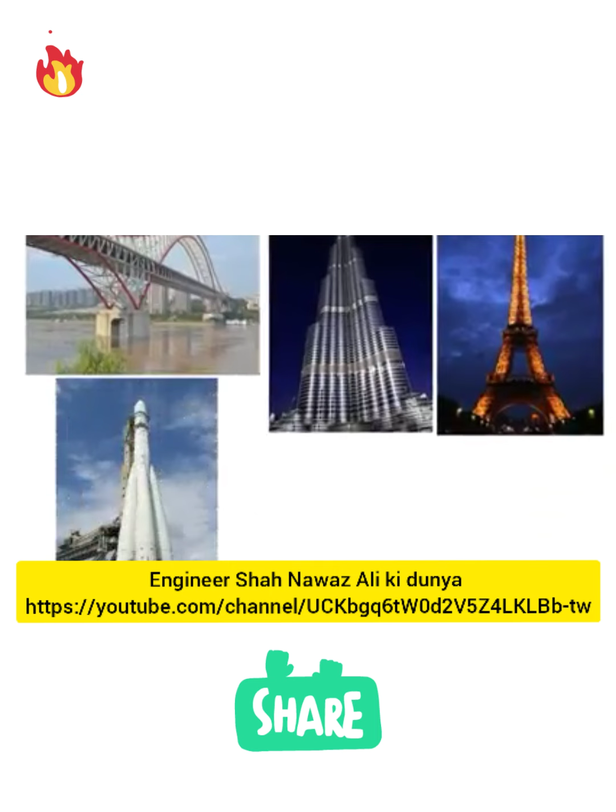So first, structural engineering is about calculating and understanding the forces, strength, stability, and so on within a structure. It could be a bridge, a skyscraper, a landmark, or even a spacecraft or aircraft. Remember, these structures are very heavy and need to support their own weight so that they don't collapse. Now this subfield is the most math intensive and has lots of physics.

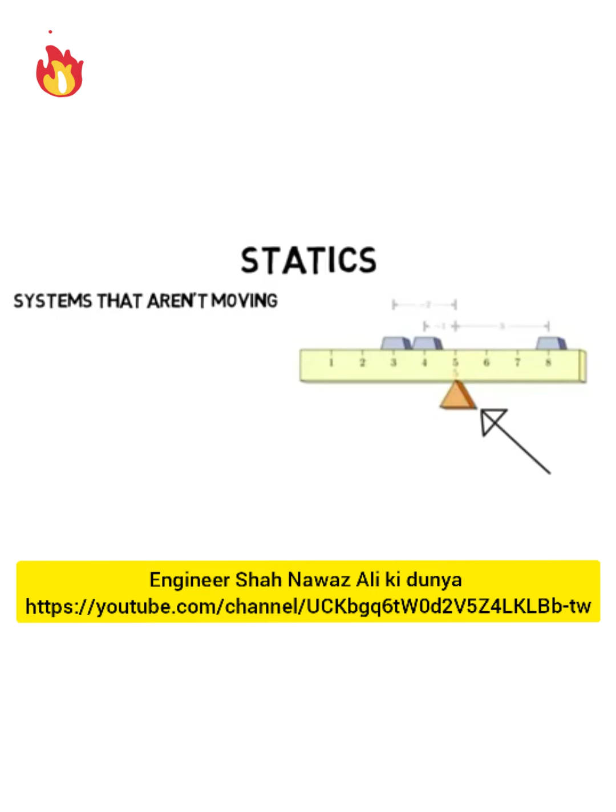All civil engineers will take a class called statics, which is all about the forces and systems that are not moving. In basic physics, you may have done a statics problem, like where does this support have to be for the system to be totally balanced and therefore not moving. You summed all the forces which equaled 0 and all the torques which equaled 0. And that's the basics of statics.

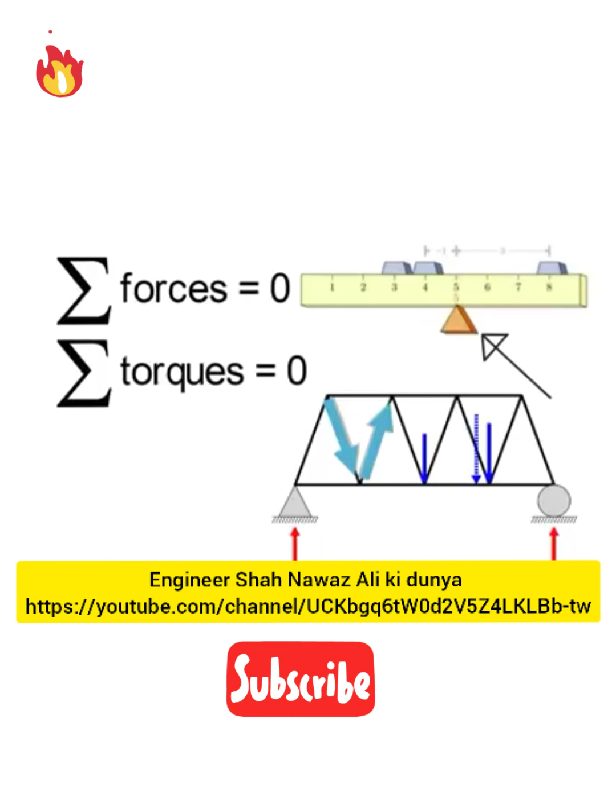So if you're looking at the forces within a bridge or truss, well, the same principles apply, but now there's just more to it. The weight is straight down as shown in blue, all the beams exert forces on one another, but the sum of them is equal to 0, and the torques sum to 0 as well because the bridge is not moving. And it's of course even more complicated than this, but if you enjoy that kind of basic physics you see above, then you'll likely enjoy the statics and physics you see in structural engineering. So that's just a very simplified explanation, but now let's dive into some of the classes they would take.

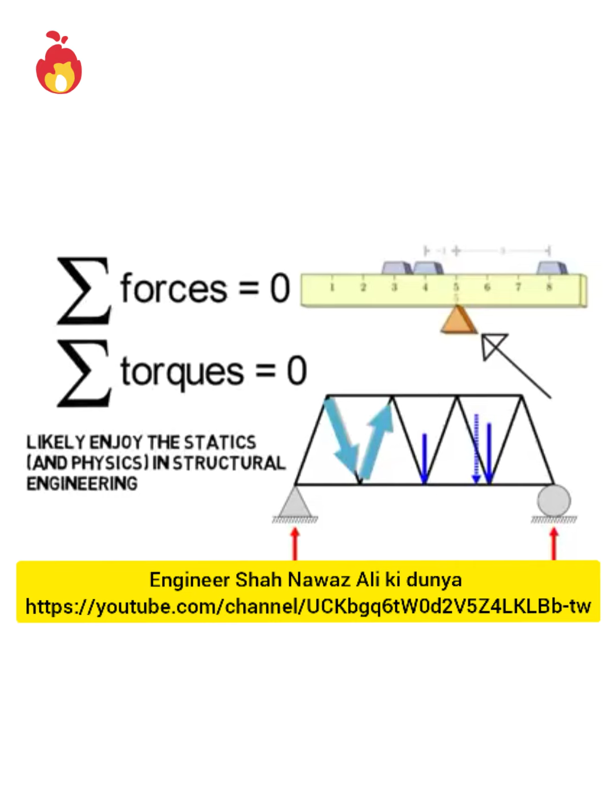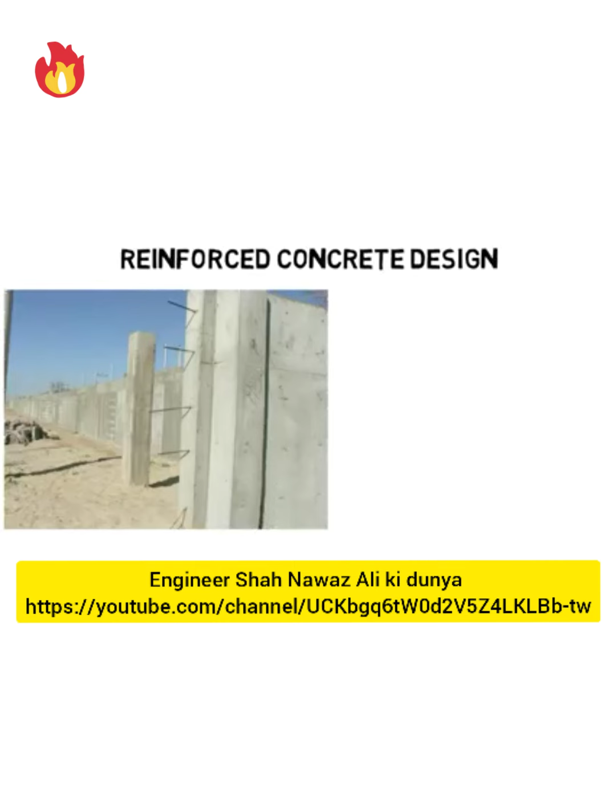One class that would be important for structural students is a reinforced concrete class. In concrete structures, they reinforce it by putting steel beams in the concrete. We can't see those beams, but here, before construction is done, you can see them sticking out, or you can see a lot of them on these unfinished columns. So why do they do this? Why isn't concrete good enough?

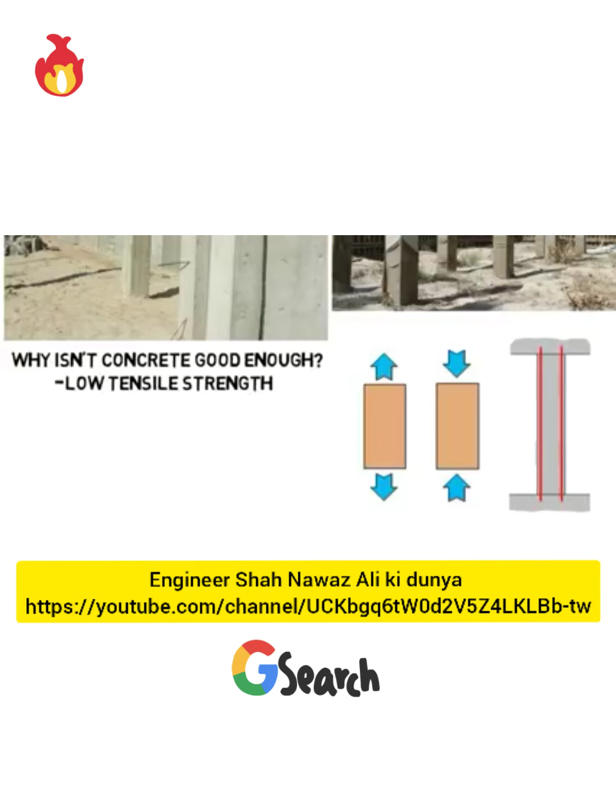Well, concrete alone, once hardened, has low tensile strength, as in it does not handle being pulled very well. However, it's okay with being compressed. But to counteract that low tensile strength, they add steel beams and pour wet concrete, which hardens around them, and then those steel beams have high tensile strength to counteract those types of forces on the structure.

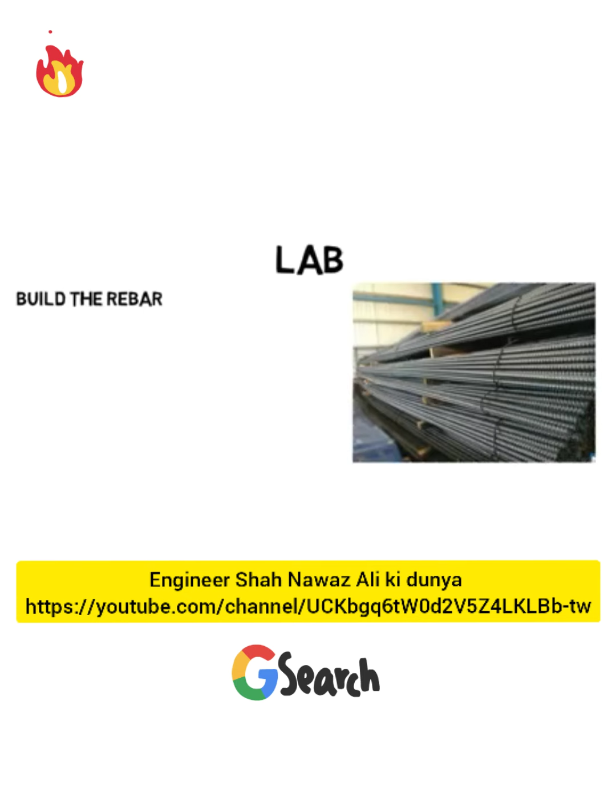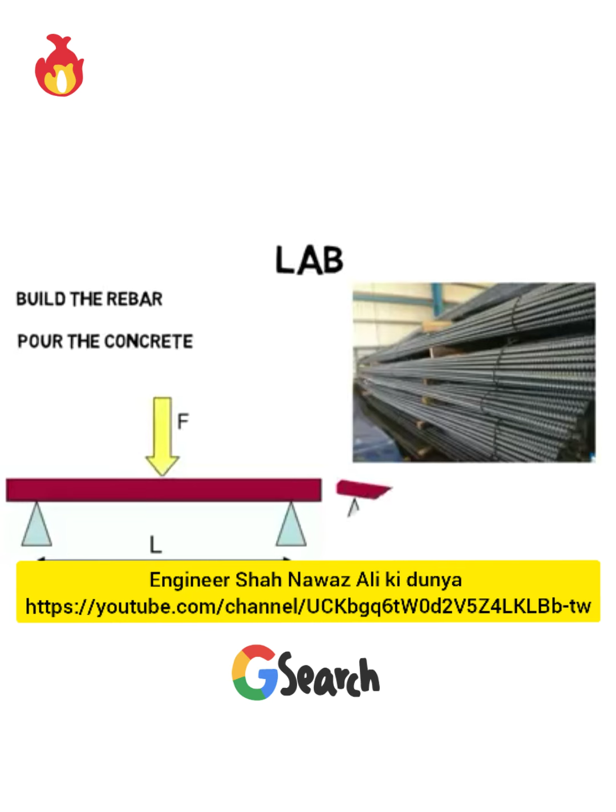So in a lab for this class, you might build the rebar, or the steel reinforcing rods, pour the wet concrete onto them, then once it dries, use a machine that holds the beam on both sides, then apply forces in the middle and keep increasing the force until the beam breaks or cracks and starts falling apart. That force being applied is sent to a computer that tells us the loading on the beam so we can collect the data and get the properties that we need.

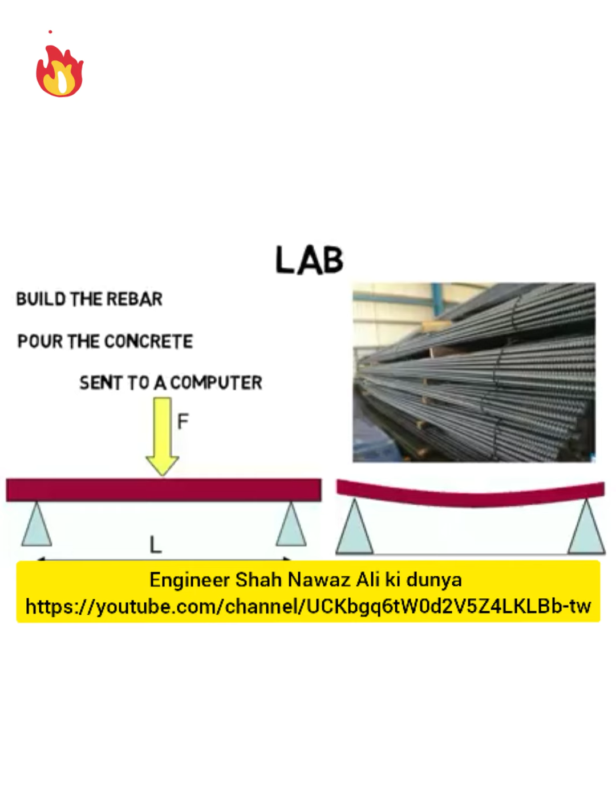You could take structural dynamics as an elective class. Dynamics is about moving systems, unlike statics. So this is one of the few classes where motion is included. So whether it's wind or an earthquake that shakes a building, you need to know how that motion will impact the structure itself and all the forces within it. I've shown this animation before, but mostly for mechanical engineers as it's a vibrating system that they can analyze, but civil engineers could get into this as well.

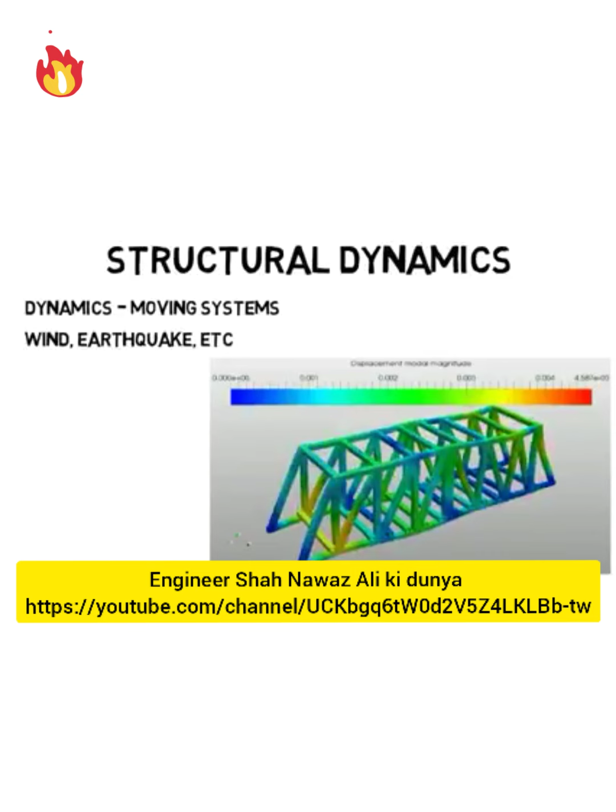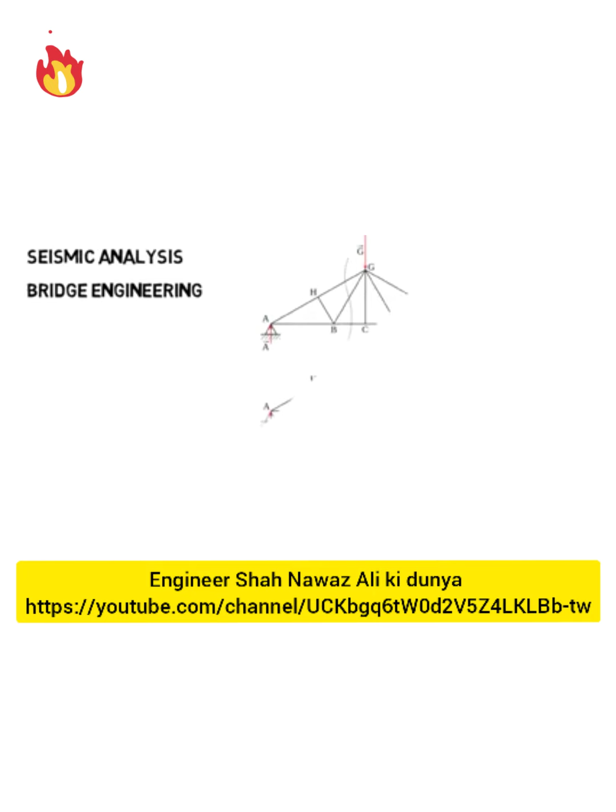They have to make sure their designs can stand up against any type of movement the structure may be subject to. You could take an elective class on seismic analysis, which is specifically about calculating the responses of a structure to an earthquake, or one on bridge engineering, which would be a class on highway bridges, materials used, distribution of loads, and how forces are spread throughout the structure, and so on. Mechanics of materials, like how twisting and bending a beam or column causes it to become internally stressed. Timber structure design, which is about analyzing properties and forces within wooden structures, and much more.

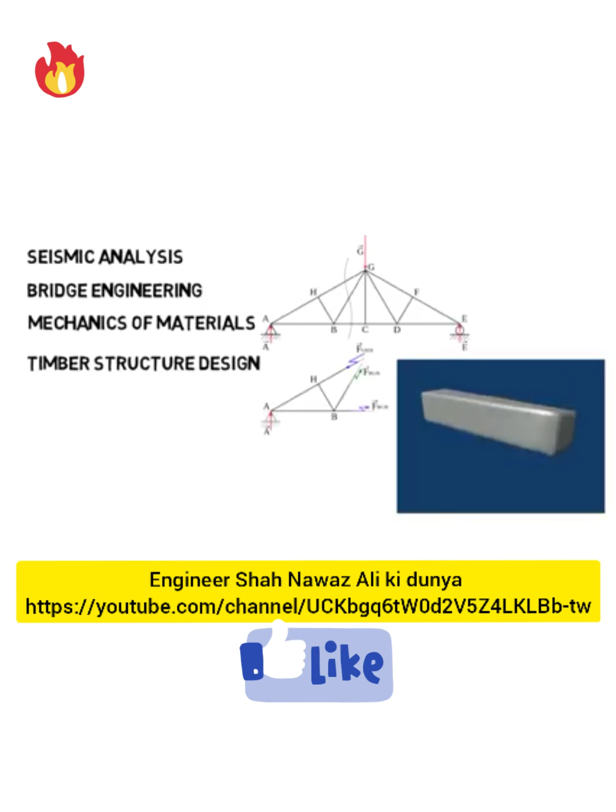See how even if you choose structural engineering, you could still take many different classes from the other structure students? It's a very broad major, but hopefully you really get the idea by now. Lots of physics in this discipline, but mostly statics, or forces and structures without movement. In the real world, these engineers often work on the computer and use software for their designs, where that software does that advanced math to determine the forces throughout the structure, like you see here with an office block and its components.

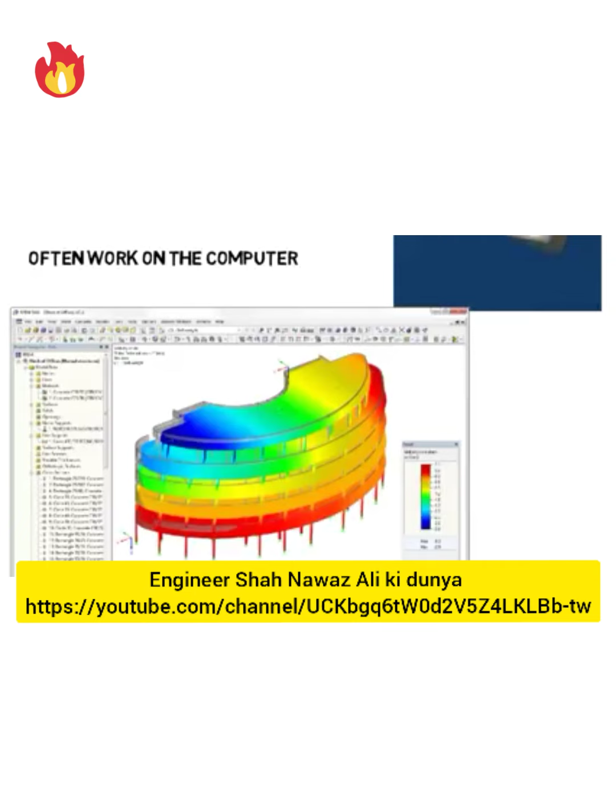You may still have to do hand calculations, but most of the rigorous analysis you learned in school will be left to the software. Now let's move on to geotechnical engineering, and you'll already see how different these disciplines are. Geotechnical engineers are concerned with the behavior of earth materials like rock and soil, but the main focus is soil. This may seem odd, but you'll see how important this is.

The structural engineer can do everything right to make sure the building will stand up, but if the geotechnical engineer messes up and you put a structure on soil that can't withstand it or is uneven, the building could fall, sink into the ground, or even lean to one side, probably the most famous being the Leaning Tower of Pisa, which was a result of soil issues.

Then they also have to consider the foundation of the structures that are being designed, like should they have a shallow foundation or a deep foundation. You may not realize it, but our houses and all the buildings you see have foundations that go underneath the earth to keep the structure as stable as possible by transferring the weight from the structure to the earth.

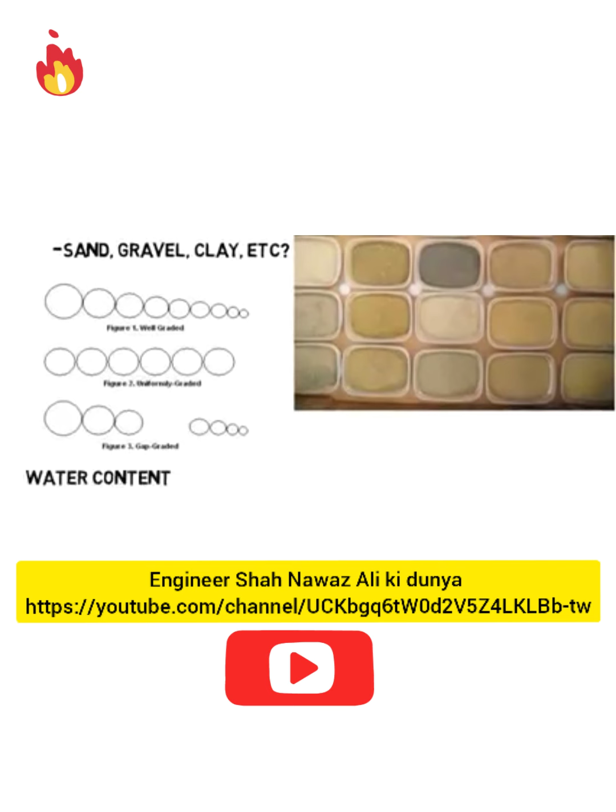But geotechnical engineers rely heavily on testing. So a lab you might see in college is to go out as a class and collect soil samples around your university and bring them to lab. You would have to classify it, like is it sand, gravel, clay, etc. There are many soil types, and you may have to look at the grain size or how it reacts to water. You determine its water content by analyzing the sample, which will be comprised of solid soil, water, and air of different masses and volumes.

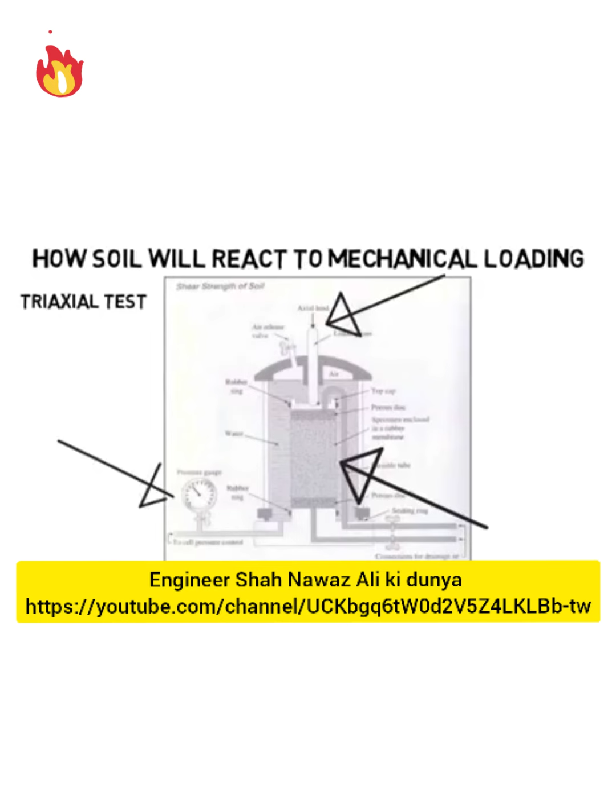But most importantly, you'll measure how the soil will react to mechanical loading or to different forces acting on it. So you might perform a triaxial test, for example. Too complicated to explain for this video, but essentially you put the soil in an enclosed area and apply a force or load to the top which pushes down on the soil. Then pressure sensors measure the pressure at different points to see how the soil is being affected.

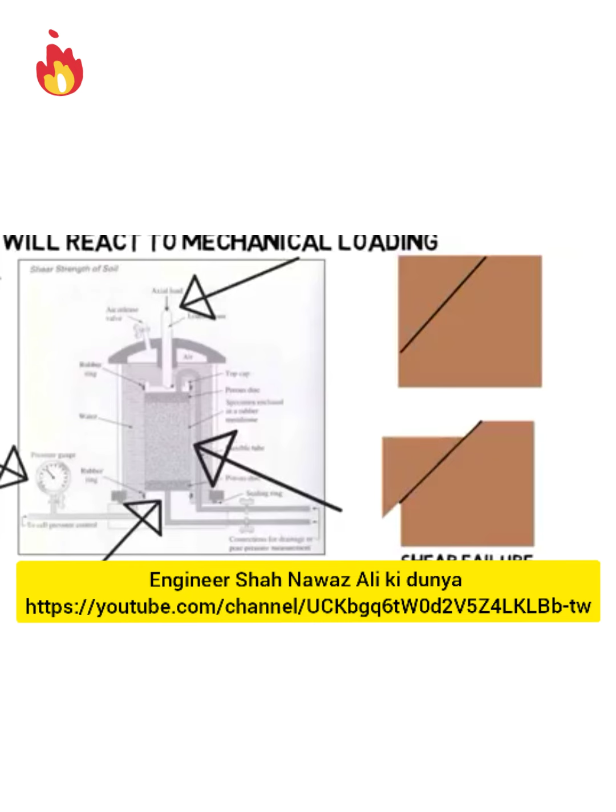If you imagine a square sample of soil and you add a force to the top, the soil can fail along some weak plane. Basically, the weight overpowers the friction holding the soil particles together, and the soil will start to slide, which is known as shear failure. Its ability to stand up to this is known as shear strength, which is one thing that the triaxial test on the left tests for.

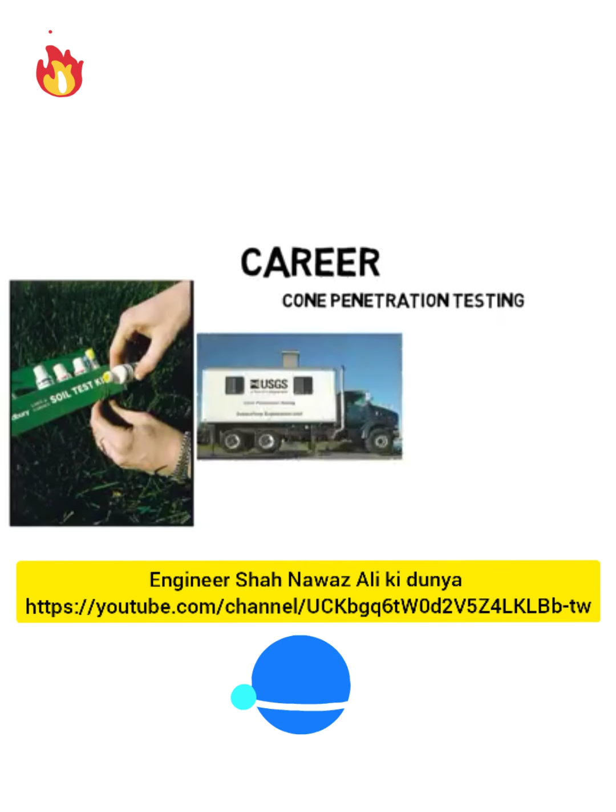And this leads us to what a career in geotechnical engineering could be like. You might be the person who goes out to the field where a structure is going to be built and collects soil samples all around the area for testing. Or you could do testing at the field. One of the most used tests right now in this field is cone penetration testing, where a large truck goes out to the field which has all this equipment on it, and a cone is pushed into the soil, and the pressure will be monitored by a computer on the truck as it moves through the soil into the earth. Based on the pressure, you can analyze the soil mechanical properties.

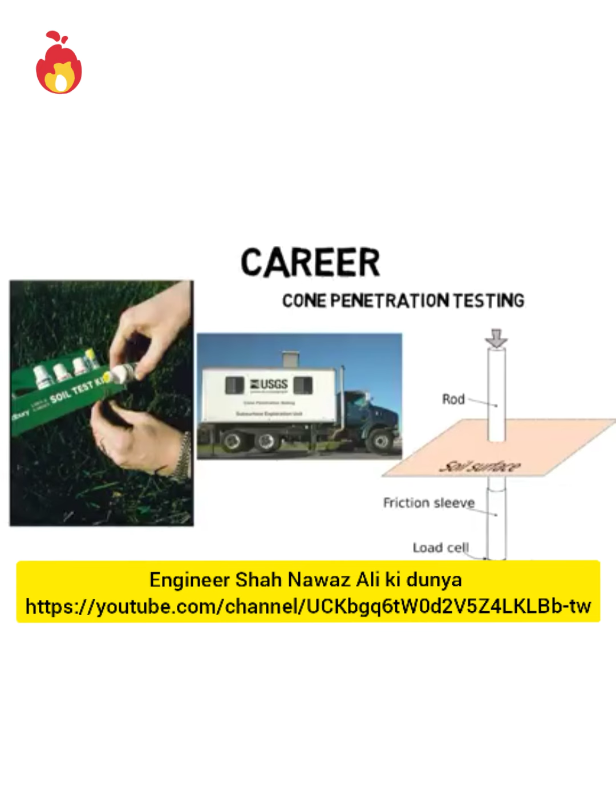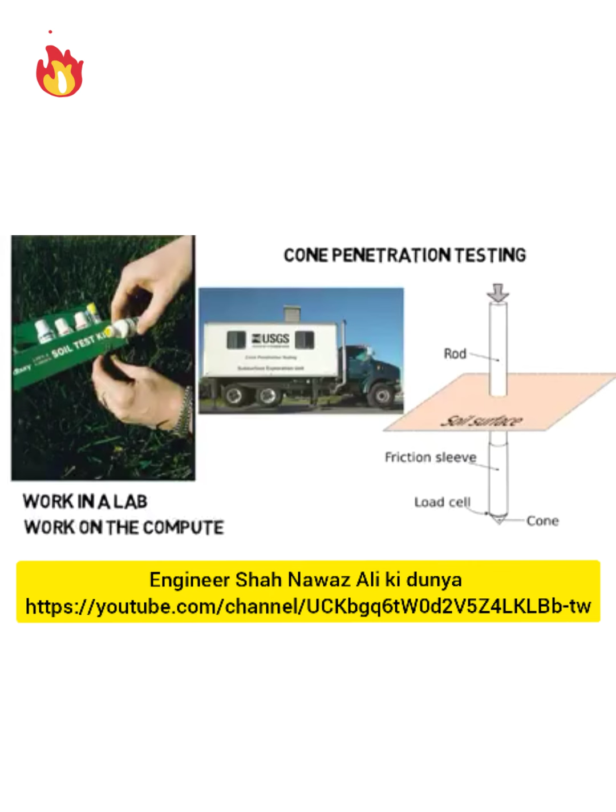Or maybe you could work in a lab where you would do the testing on the soil after it's been collected, like I showed with the triaxial test. Or maybe you could work on the computer and input the different types of soil from the various locations at the site, so you can digitally lay out the area that the structure will rest on. So you could be in the field, in the lab, or on the computer.

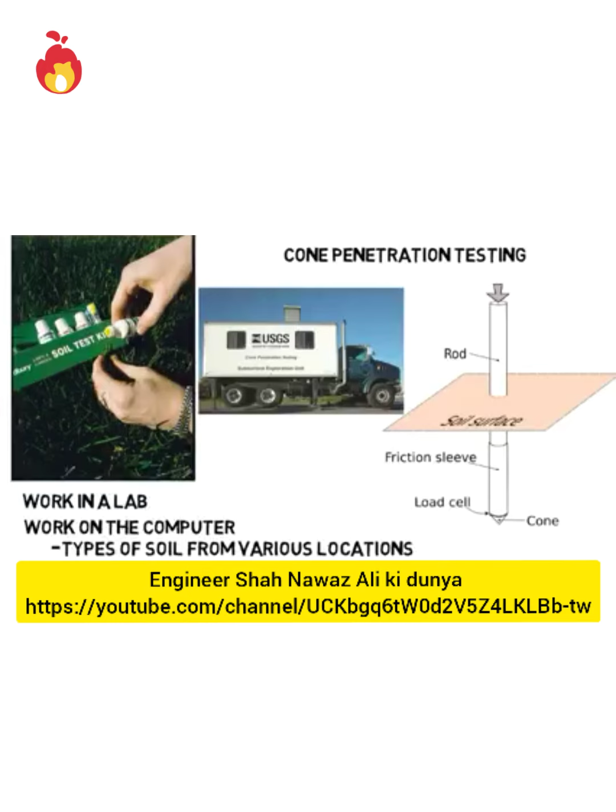Your elective classes could include geotechnical earthquake engineering, which would be like learning the dynamic behavior of soil as opposed to the structure itself. Then slope stability analysis and how to safely design structures on slopes. An example would be an embankment dam. Analysis of deep foundations, where the structure goes deep into the earth for a stronger support, like for skyscrapers. And of course, there are many more classes.

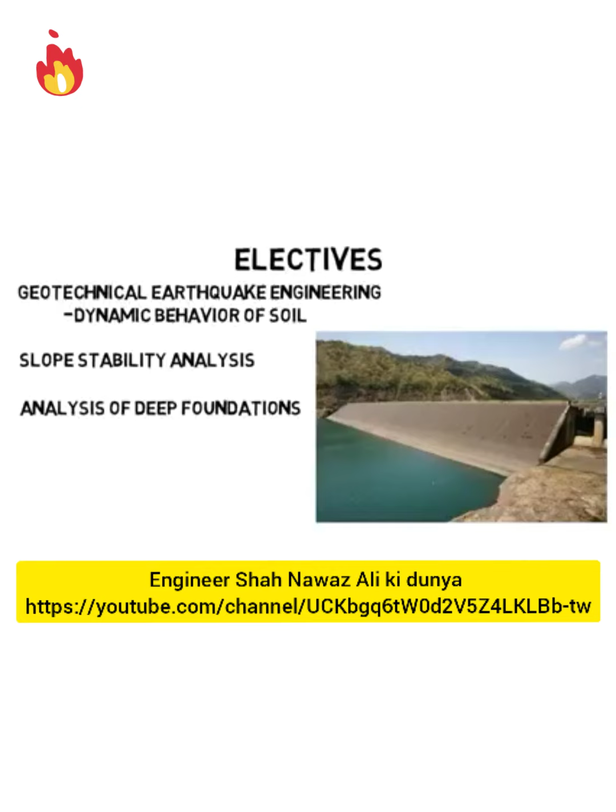Now let's move on to water resources engineering. This is about the design of systems to manage human water resources. They could work on a water treatment facility, designing dams, pipelines, channels, canals, and so on. Maybe you have to design a storm drain system in the event of a large storm. Where is all the water going to go, and how will you get it to the ocean efficiently?

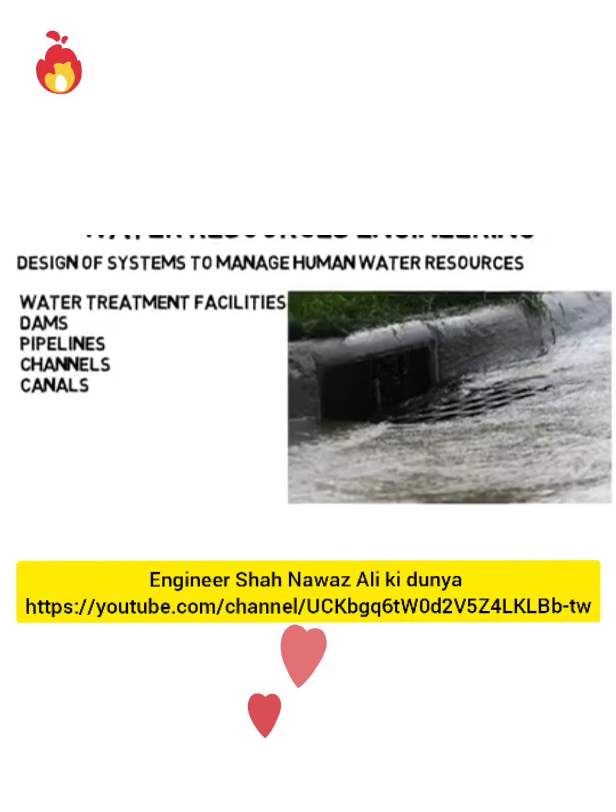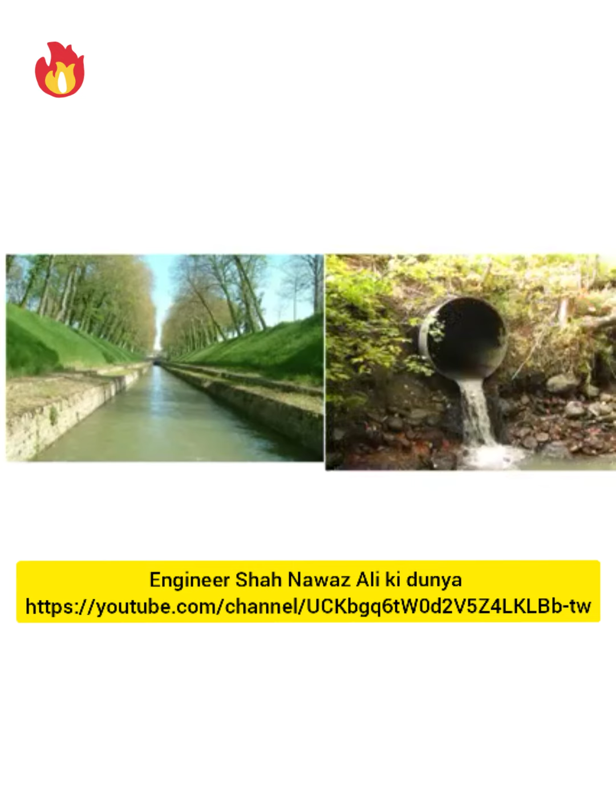Or you could design a canal, which is an artificial waterway to transport water for irrigation, or can be used for ships and boats. Or you could design a culvert that will allow water to flow under a road or trail or some other obstruction.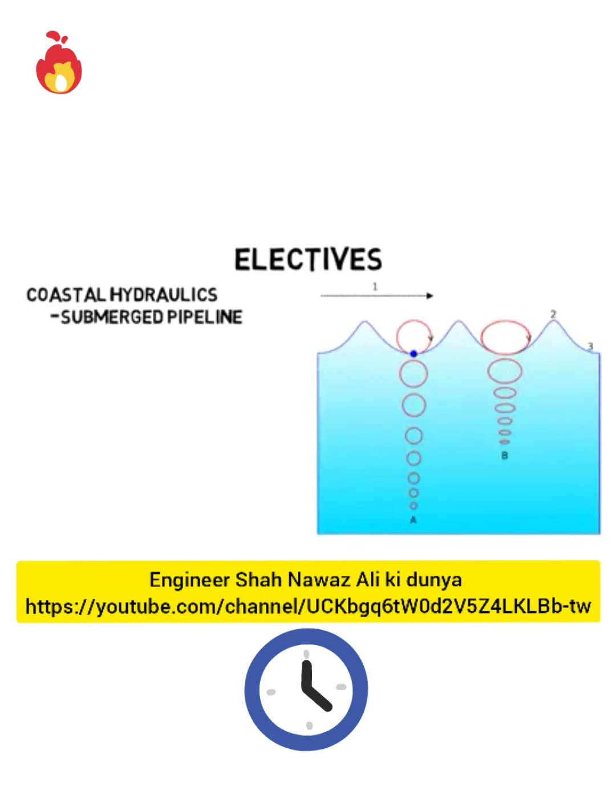Elective classes you could take include coastal hydraulics, where you learn about ocean wave propagation, submerged pipelines, seawalls to protect human habitation, and so on. Or open channel hydraulics, which is about fluid flow in an open channel as opposed to a closed channel or pipeline.

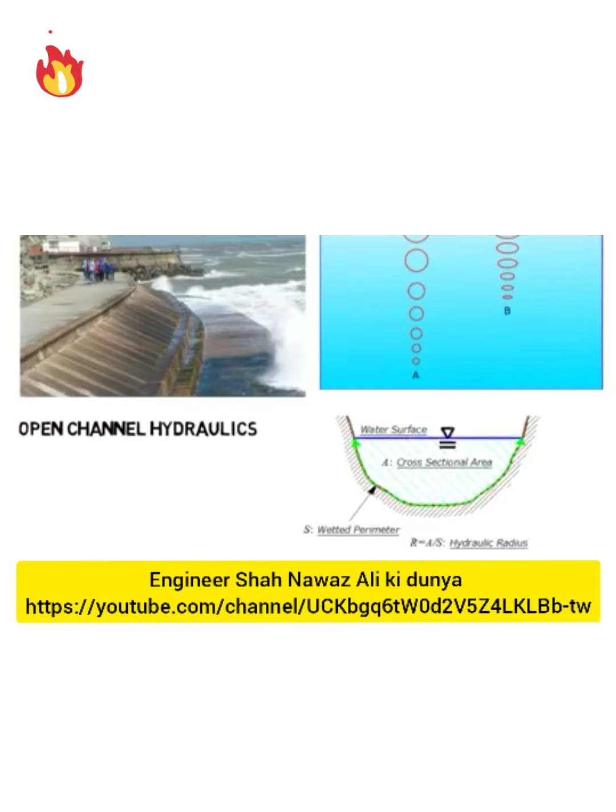And last is transportation engineering. This is about safe and efficient movement of goods and people. These are the engineers who design streets, roads, highways, railroads, public transportation systems, and even airports.

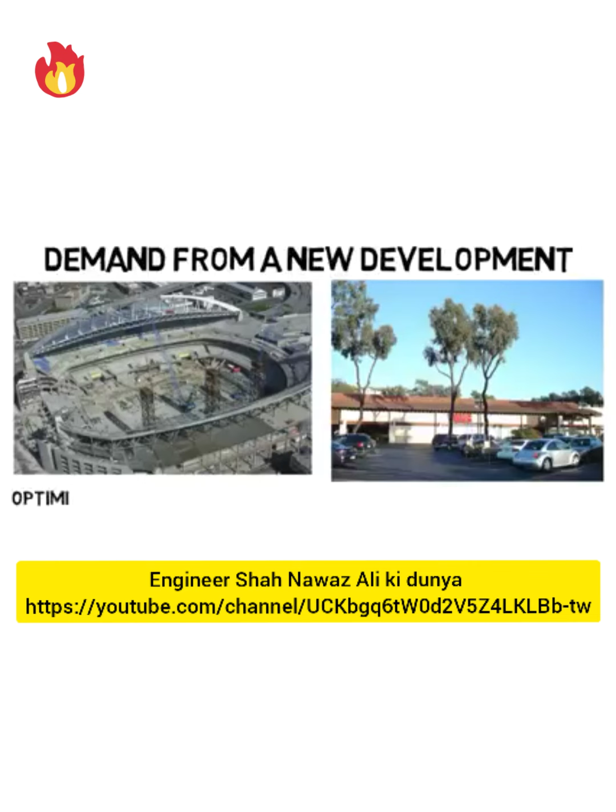So maybe this engineer has to look at the kind of demand from a new development, whether it's a new stadium in your city, all the way to a new grocery store in a new location. This is going to cause new types of traffic throughout the area. The engineers would try to optimize how the new development impacts existing traffic. They would look at data from other similar places to see what kind of traffic they get, then try to make improvements where possible.

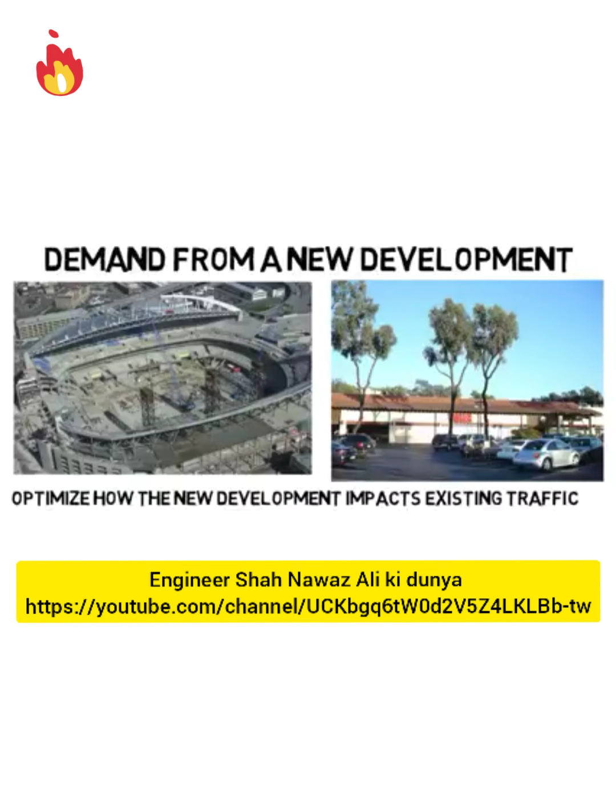It could be simple like adding a bus stop in the nearby area, all the way to expanding the roadway to allow for more traffic. They could work on the geometrics of the roadway, such as what radius of curvature does an off-ramp have to be for a car going 55 miles per hour so the tires won't slip.

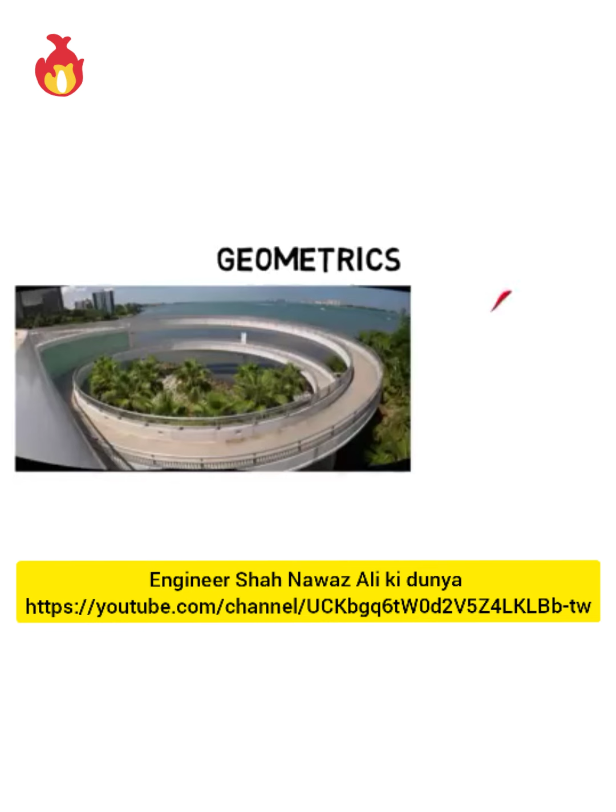Or if they're going up an incline, the driver needs to see far enough ahead of them to stop if there's a sudden obstacle. Or what do the cross sections of a freeway need to be for the lanes and the shoulders to accommodate the amount of traffic that's expected?

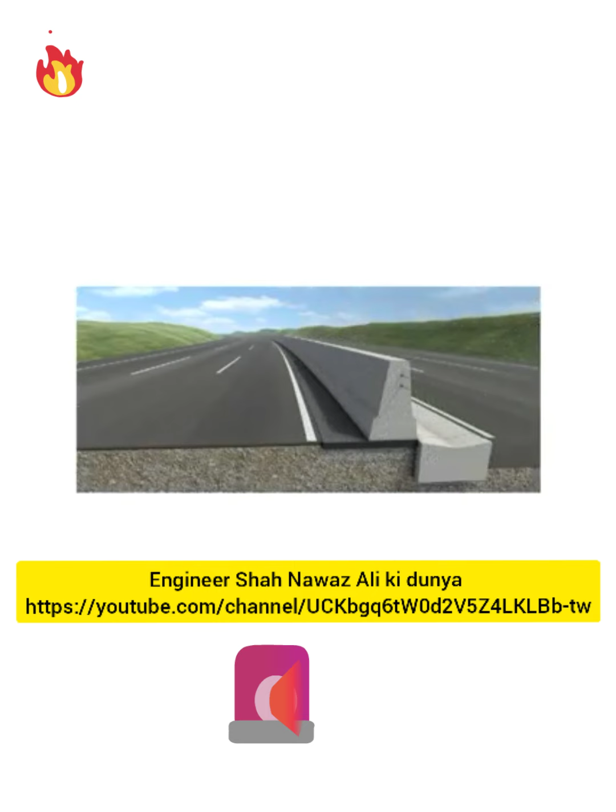Or let's say a highway interchange is being designed. A structural engineer would make it stable and design the structure itself, but the transportation engineer would determine maybe how many lanes are needed for the interchange based on traffic, or how the merging should happen to maximize safety. They make sure that the layout is designed to maximize traffic flow and safety rather than the physics of the structure itself.

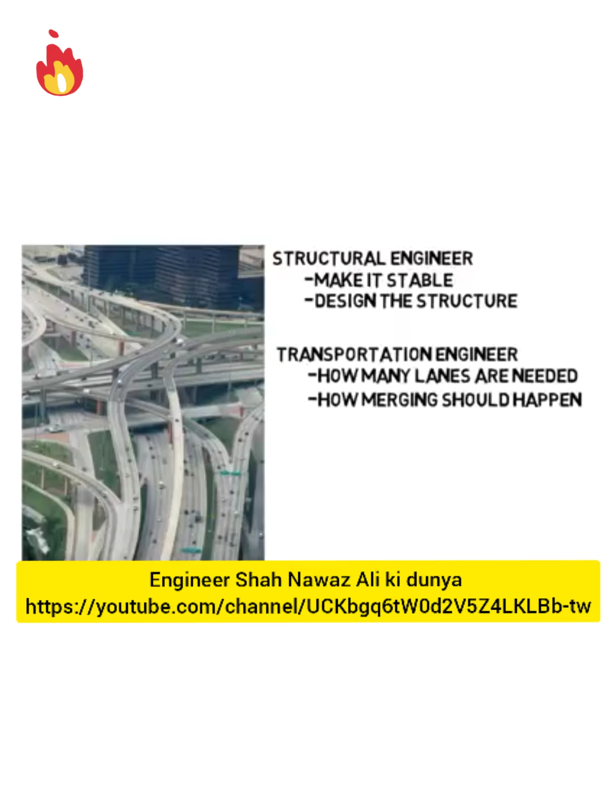Often these engineers evaluate potential improvements to cities in terms of transportation rather than create a totally new design. As in, you probably haven't had many new highways put into your city in the last few years, but there's probably been plenty of construction, whether it be adding an express lane or a bike lane, etc.

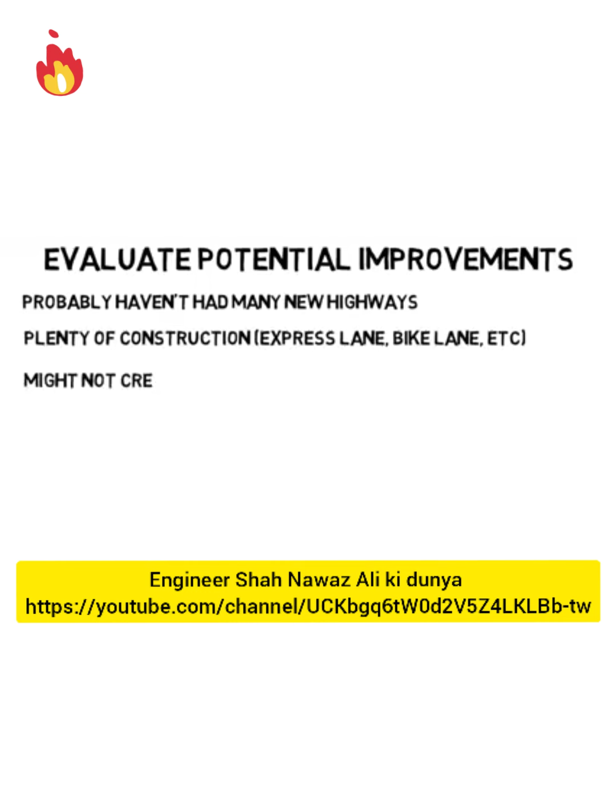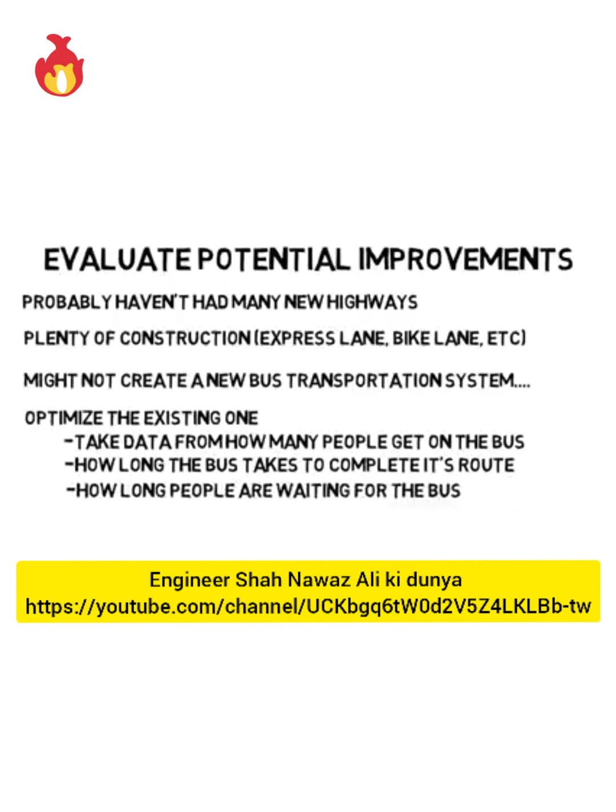So they might not create a new bus transportation system, but they may optimize the existing one. Maybe they take data from how many people get on the bus, how long the bus takes to complete its route, how long people are waiting for the bus, and so on to optimize the route, the amount of stops, and more.

Your career will also likely involve a good amount of computer work. You might have to create a layout of the new lane, off-ramp, bridge, or whatever you're designing on AutoCAD, which is a very important software for civil engineers. Or you could use software to analyze and simulate traffic.

You could actually lay out the roadway of a city and use collected data of traffic during different times of the day and simulate new additions. Like you could add in a stoplight somewhere and see what the new traffic would be like. Or you can make a minor change, like make a certain stoplight stay green for just a few seconds longer and see how it affects traffic on those streets.

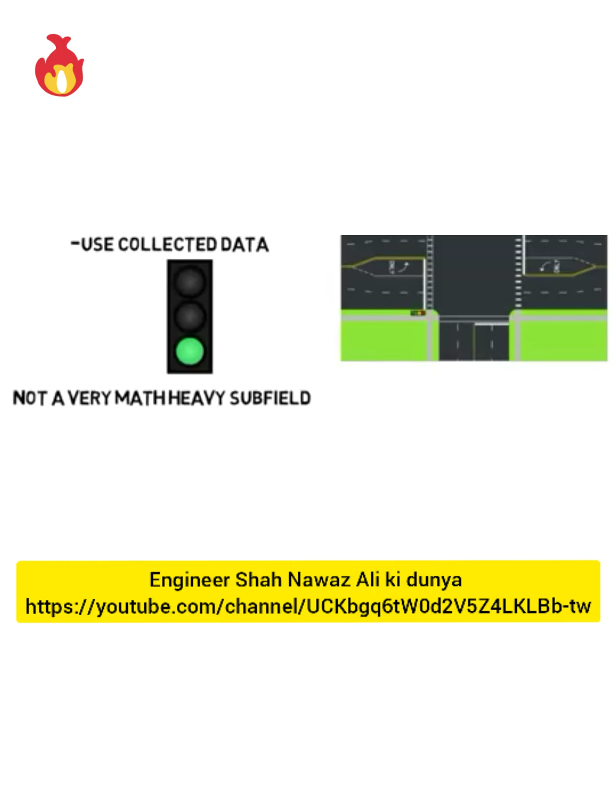And just note, this is not a very math-heavy field. In fact, it's probably the least math-intensive of the 4 subdisciplines I've talked about. It's more about taking data and analyzing it. Even when I talked about the radius of curvature and how fast someone should be going, you won't use the coefficient of friction and do circular motion physics or anything like that. You use even simpler equations to get what you need.

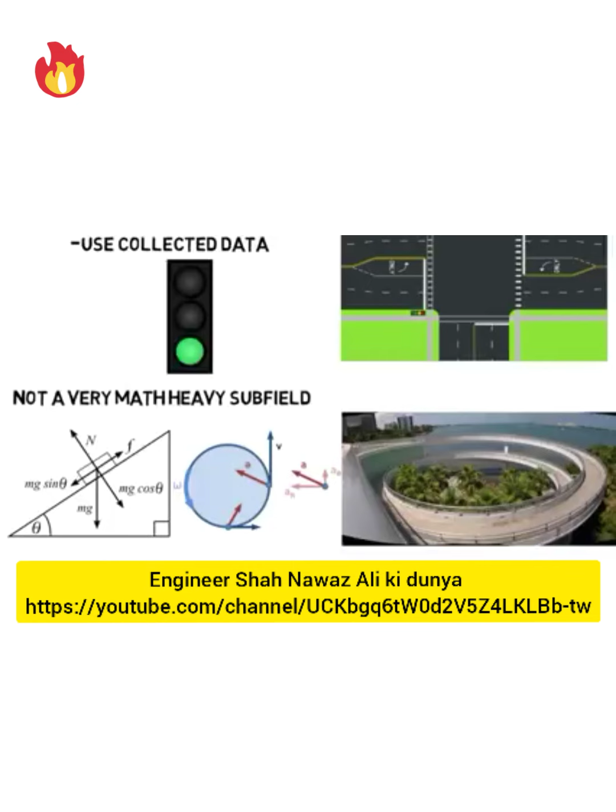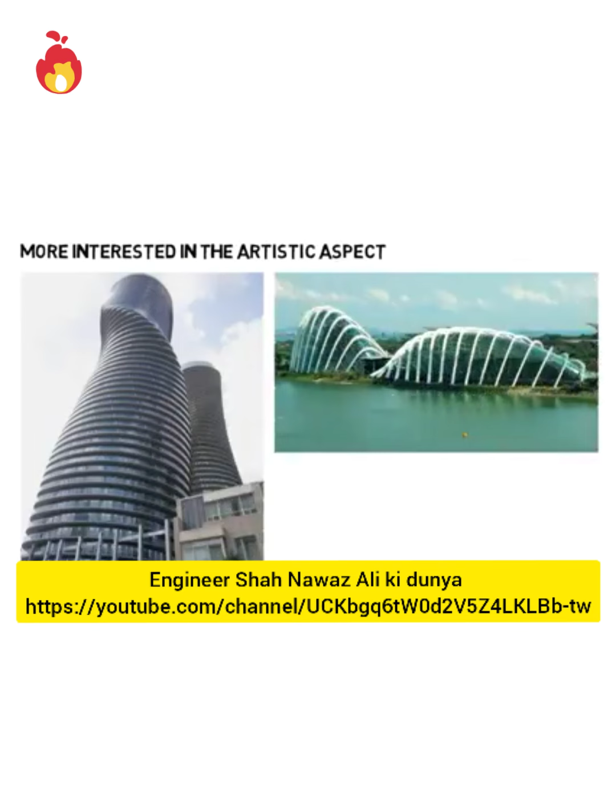Now that's all the main subdisciplines of this major, but there are some final thoughts I want to include. If you're watching all this and are more interested in the artistic aspect of building and structure designs, then architecture will be better for you. Architects deal more with the floor plans, spatial concerns, and the shape and design of the buildings.

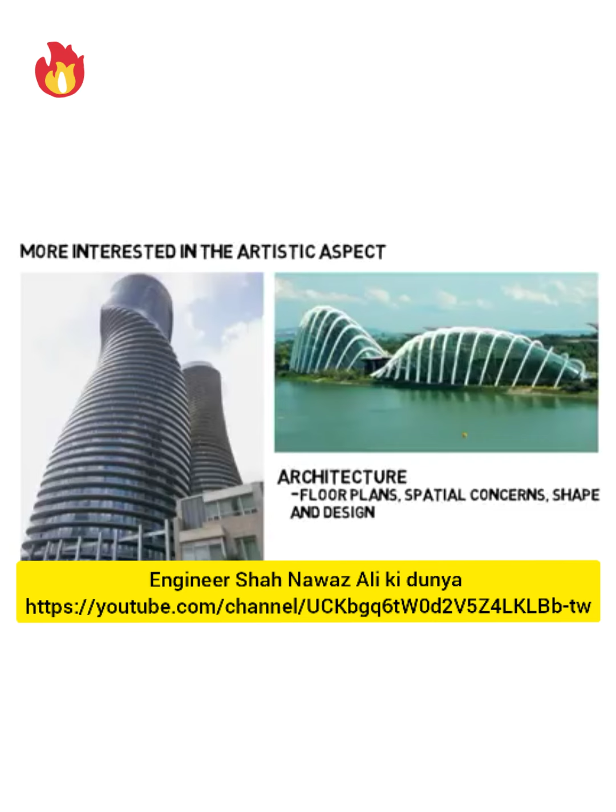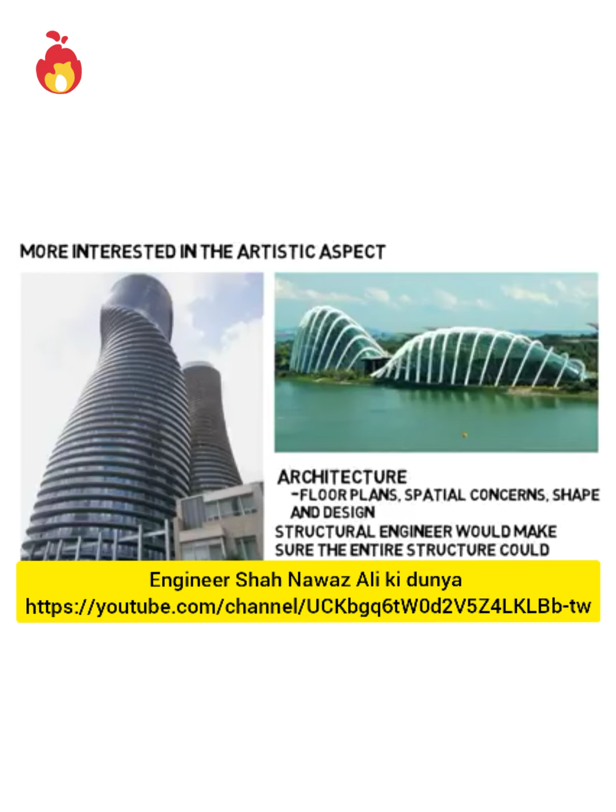They have to have an understanding of structures and physics, but not quite as much as a structural engineer. They would hand off their design to the structural engineer, who would really make sure the entire structure could support itself, and they would deal with more of the technical work. Then, if you want to be the one who puts on the hard hat and does all the hands-on work with the machines and physically builds the structures, then construction will be better for you.

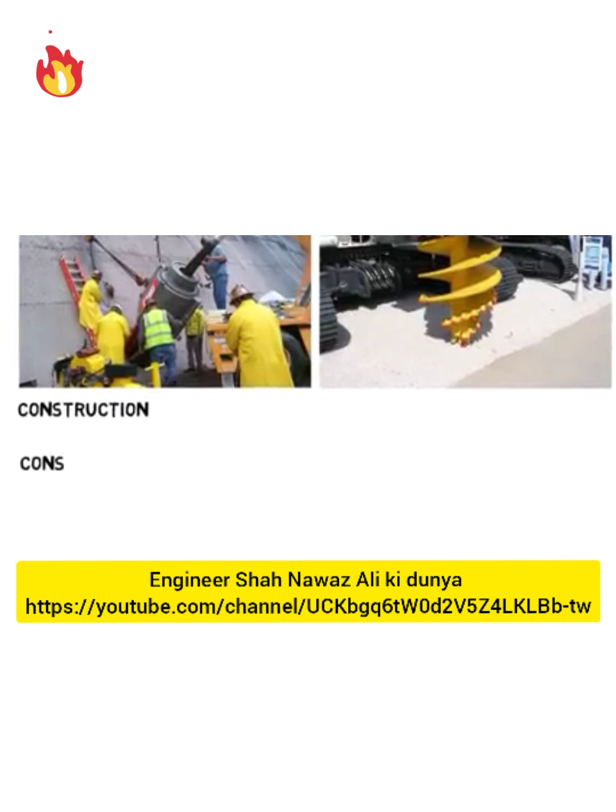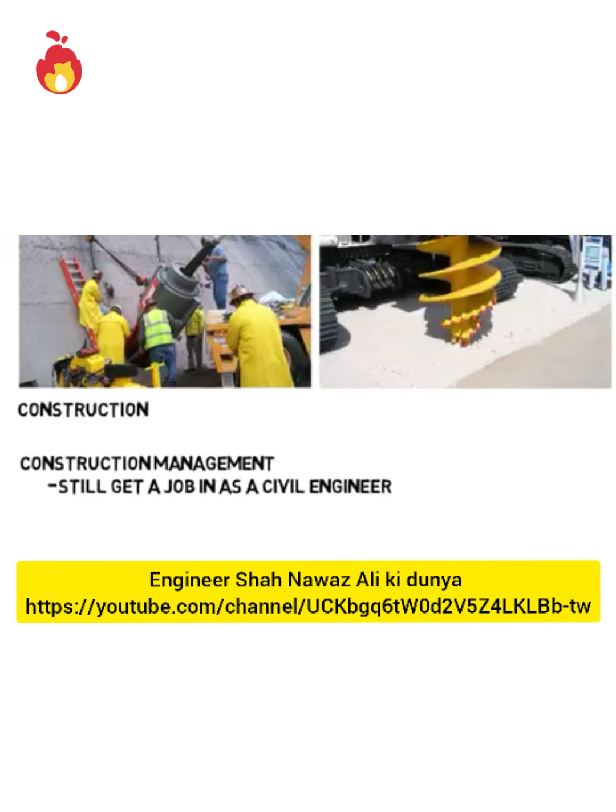But then there's also construction management, which you can still get a job in as a civil engineer. Construction companies will hire civil engineers because of their technical background. Construction is the hands-on part, but construction management is more about guiding the construction, putting together schedules, budgeting, and figuring out how all the pieces will come together.